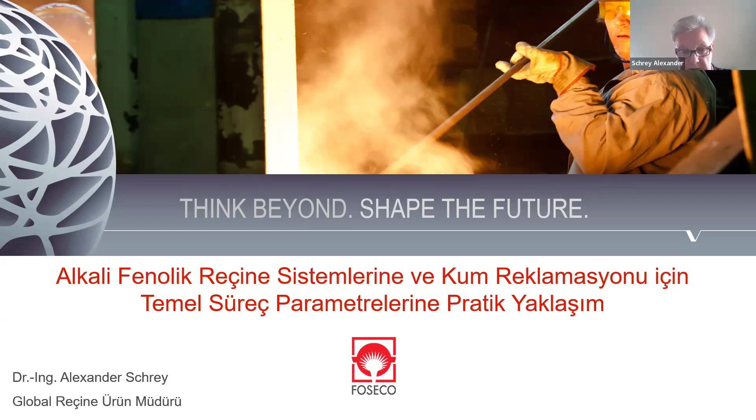Well, what are we talking about today? Alkaline phenolic binders, in particular those which are ester set. So we will cover the main binder components which are involved. Don't be afraid, I'm not doing any chemical lesson, not at all, but just introducing briefly the main binder components. From a foundryman's perspective, I think it's significantly more important to know something about the sand requirements. And of course, this is the practical approach. We are talking about product application and typical sand control parameters, which everyone who is dealing with this type of binders should be aware of.

We will spend some time on what we call sand management. So what is important for you and us, being partnering here, to control in respect to the sand management, including the important topic of sand reclamation. And finally, we will just sum up and go back to the main topics of this session.

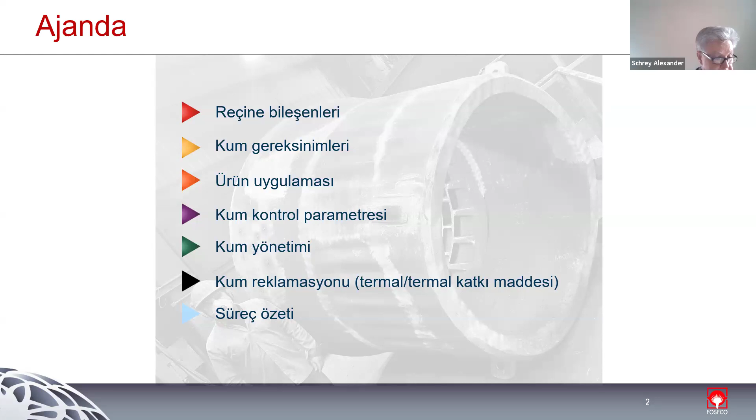So, basically, alkaline phenolic binders, irrespective of where they come from, where they are made, they are, from chemistry, always based on the same setup of main components. So basically, we are talking about a two-part system comprising a phenol formaldehyde resin and the esters as part two components, sometimes called catalysts. In that respect, that phrasing would not be correct. It's even more than a catalyst. It's a co-reactant which undergoes a chemical reaction with the resin.

The resin, as said, does contain phenol and formaldehyde, that's basic organic material. However, in contrast to many other binder systems you may be aware of, for example cold box binders, these ester set alkaline phenolics are water-based systems. They are highly alkaline due to the presence of alkali metals, which play a significant role. And as any phenol formaldehyde resins, these alkaline phenolic binders do contain various additives to ensure proper pattern release, for example, to ensure significant bench life, and also to ensure that the binder has good adherence on the sand grains. Part two, as said, is always, in any case, an ester, a single ester, or even a mixture of various esters. These esters are selected from various raw materials and composed into the final product in order to provide you with the required setting properties.

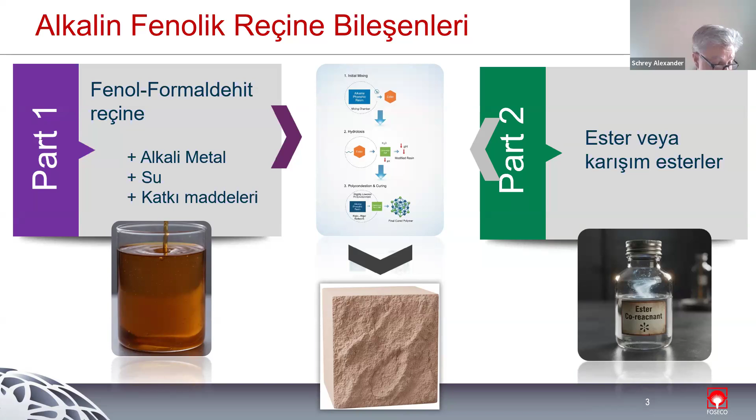So, sand requirements. I'm aware of that. There are probably many foundrymen from foundries who are casting basically steel castings. They may not in every event use silica sand.

However, silica sand is the most common sand material for alkaline phenolic binders. As you will see later on, other sands than silica, like olivine or chrome sand, are also applicable for these alkaline phenolic binders. There are not that many requirements in respect to silica sand, compared to cold box binders. So the binder system, alkaline phenolic, is less demanding. That means, for example, the acid demand value is not as critical as it would be for cold box binders.

Anyhow, we should aim for a high SiO2, silica sand or silica content. The simple equation is the higher the better. We recommend not to use any sand with less than 95% SiO2.

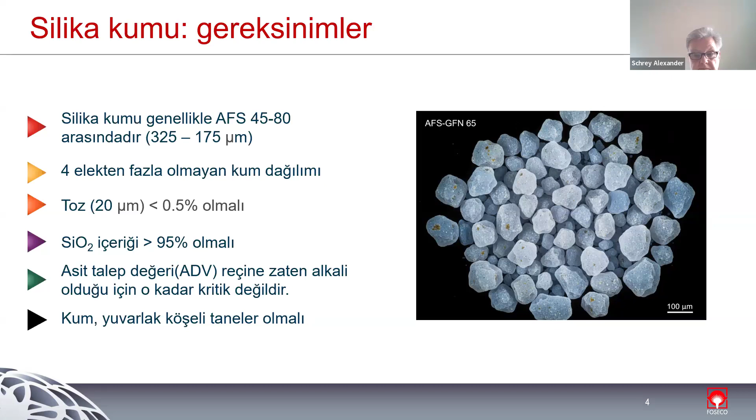Okay, let's now talk about some key parameters of product application. So, sand mixing.

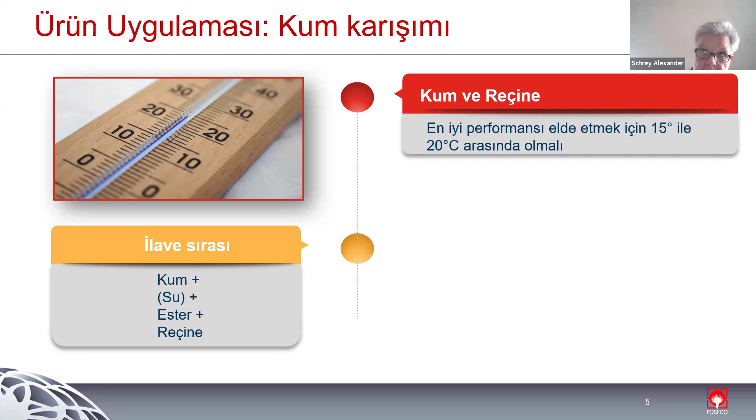Again, we are talking now, I know that, being a foundry man, probably from a just theoretical standpoint, and in particular when we are here with experts from Turkey, who are used to having significantly higher sand, binder, and ambient temperatures. But from the chemical standpoint, it would be ideal to keep both sand and binder around 20 degrees. This is just due to the chemical composition and the reactivity of the binder system, which works at an optimum at 20 degrees. Is this written in stone?

No, not at all. So we are also used to sand systems which have to work in significantly hotter climates. We are also used to working with alkaline phenolic binders at ambient and sand temperatures above 40 degrees. But this does certainly require a very good sand control, and that's what we have to state clearly - far away from being the optimum. So the closer you come to that level of 20 degrees, the better. But as said, alkaline phenolic binders will work, with good sand management and proper selection of binders and esters, also at higher temperatures, as well as they work at lower temperatures in wintertime, even down to 5 degrees.

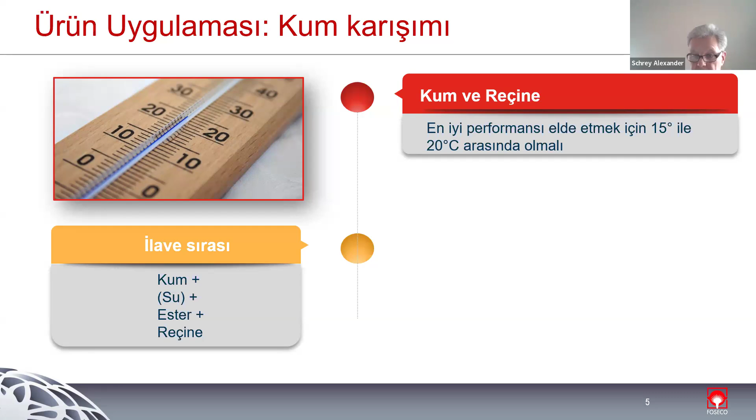Sometimes we even add, prior to the ester, some water. So what does it mean? Why should we add water, and when should we add water? Well, the addition of water is something special, which we experienced already many years ago. And I have to say in advance, this is not true for any binder system and not true for any sand system, but we should check whether or not the additional addition of water will improve the overall performance.

In general, the addition of water is, or can be, necessary only if you are using reclaimed sand, as reclaimed sand does contain residual alkaline components from the beforehand binder addition. We know that these alkaline residuals in reclaimed sand are highly hygroscopic, and they have a tendency to absorb water from the resin. I mentioned already in the beginning that these binders do contain water. So why not take the water from the resin, as it is in aqueous solution?

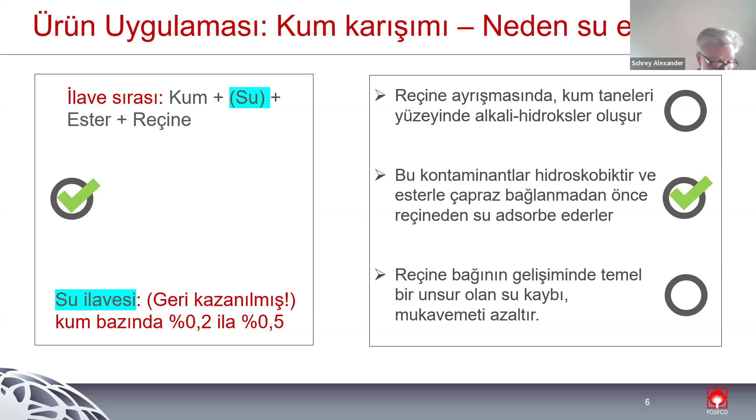This is something you should know, and we can check this in the lab pretty easily, whether this is essential for your individual binder system. But please keep in mind the addition of water might help to improve the overall performance.

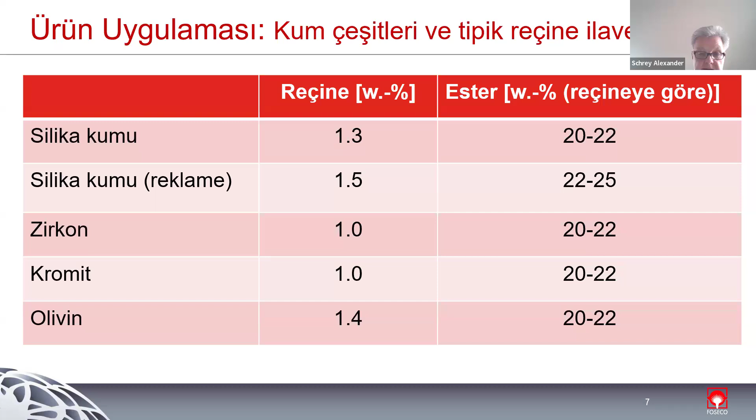If you are going to use reclaimed sand, the resin additions are slightly higher. We also displayed the typical binder addition rates for zircon, chromite, and olivine sand. These addition rates differ due to the open structure of the individual sand grain surfaces, as well as the chemistry of these non-silica sands. What you see on the right-hand side is that irrespective of the selected sand, the ester addition rate is always the same, between 20 and 25%, up to 25% for reclaimed sand based on resin. So these are the typical addition rates of the ester.

Something we would highlight in that context: on the right-hand side, we state that you should never ever add more than 20 to 25% ester based on resin. If you suffer from insufficient binder performance, please ask your binder supplier to check, but never add more binder or more ester to obtain better performance, as this will not happen. The ratio between binder and ester is constant, and if you just add more ester, you will not alter the performance. You will just increase costs and waste money.

Second point in that context, and this is significantly different from what you know from furan binders: if we want to change the speed of reaction while keeping the type of binder, we always have to change the ester grade, not the ester addition rate. So again, irrespective of the selected ester grade, whether you require a very short, medium, or long set time, the ester addition rate will always stay the same. You just have to alter the type of ester.

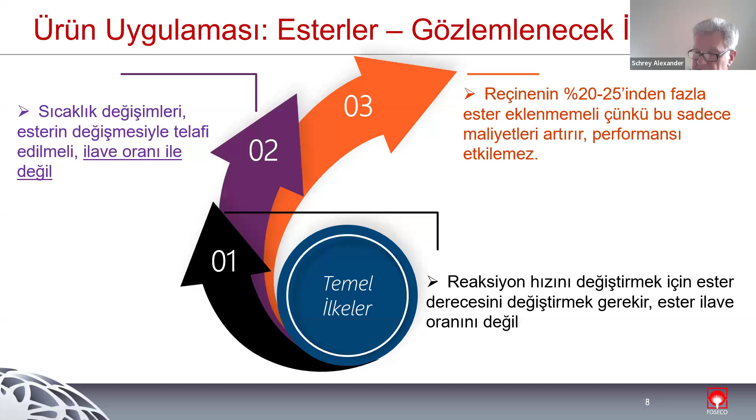Modern binder mixers and binder dosing units usually offer the addition of more than one grade of ester. But if you would like to spread the overall range of products to be made, talking about small cores, small molds, up to bigger or larger molds, you may have to alter the ester, as said.

This is usually no problem if you just follow one rule of thumb: you can mix a fast and a medium ester to get any set time in between the set time of the fast ester and the medium ester. You can also mix a medium ester with a slow ester to achieve something in between. But you should never ever mix a fast and a slow ester, as this would definitely not work and result in poor through-cure and spotting of areas in your sand mold which are not cured properly.

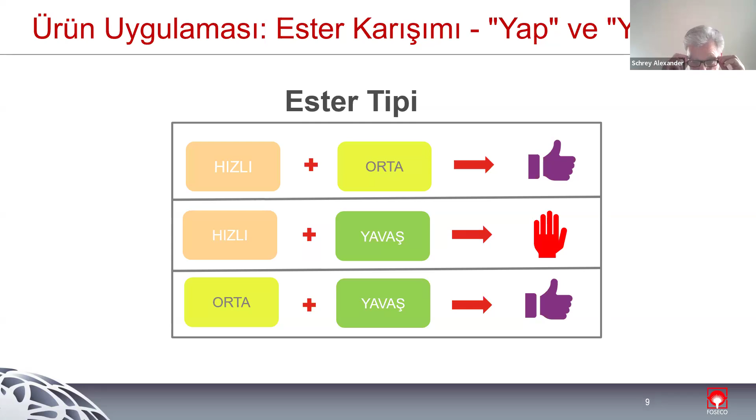So what does it mean to mix fast, medium, and slow? This has to be proposed by your binder supplier, who has to provide you with the information on which esters can be mixed easily in order to obtain the required setting properties.

Something which is quite often overseen is what we call mixer control. We strongly recommend cleaning mixers at the end of every shift, and also controlling these mixers with respect to blade wear and whether the injectors for resin and ester are still clean.

It is also important that you check whether your mixer has a couple of what we call hold back blades, in order to prevent what is called resin spotting, which is an uneven distribution of binder. So in case you see insufficient through cure in your mold, where some areas are cured properly and others are not, you should always have a look at your mixer prior to checking the binder or the ester.

It's very common that this is overseen, and just by putting a lot of caution to your sand mixer, to the quality of cleaning, the operation and the maintenance will certainly help you get the optimum performance.

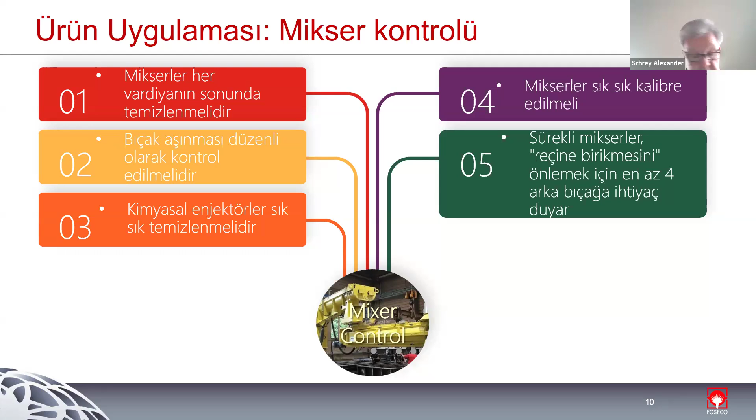Displayed again from practice, on the left-hand side you see a mixer that apparently has not been cleaned properly, and you can even see, displayed by the red arrow, some resin has caked onto that surface, with a relatively thick layer of cured sand.

This can cause uneven and unequal binder distribution. You see it here in the picture in the middle. This is what we clearly call resin spotting, so uneven distribution.

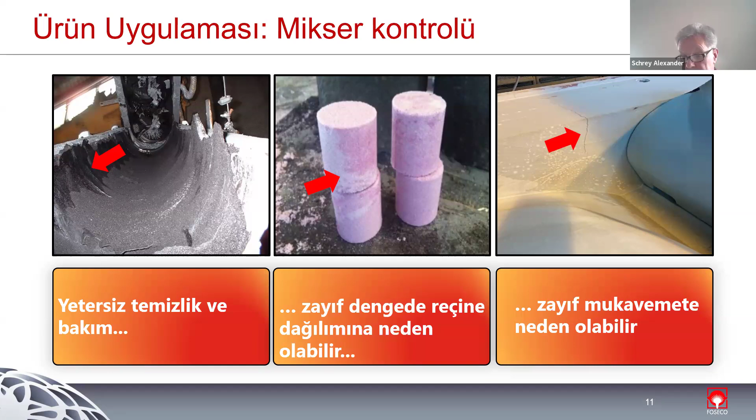However, in practice you will hardly see it if you are working with reclaimed sand. This is apparently new sand, where you can see as a result, once binder and ester have not been added properly due to poor mixer maintenance. And this, at the end, may cause poor strength and cracks as displayed here.

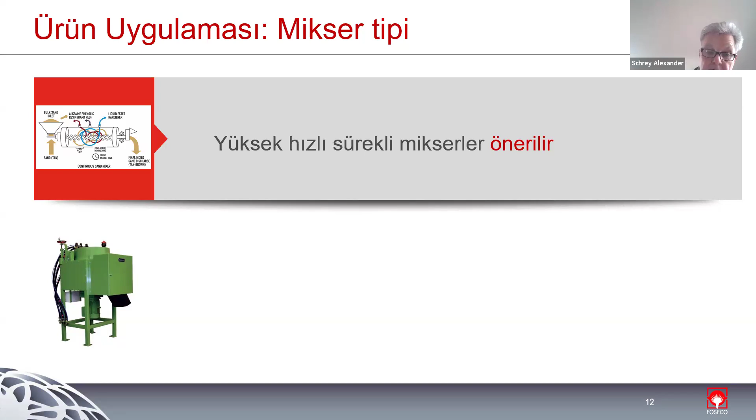Type of mixers, that's pretty easy. I think the majority of mixers used are high-speed continuous mixers as displayed above. You can, however, also use batch mixers, but this is in practice not very common.

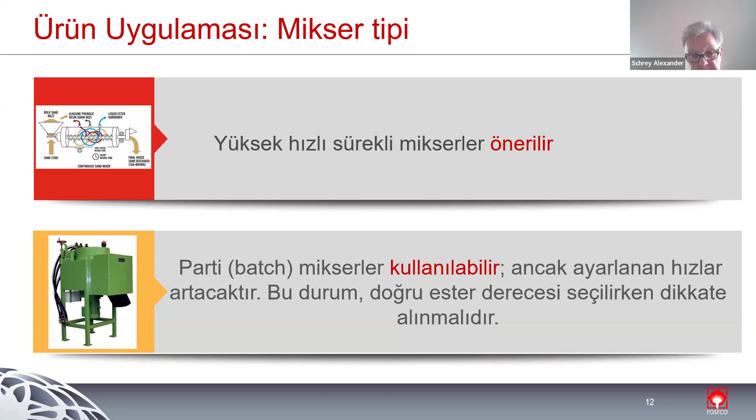If you have to do so, maybe to make a low number of cores in a different aggregate, you should take into account that the intensity of this mixing is higher in a batch mixer versus a continuous mixer, and therefore you probably have to go for a different type of ester in order to accommodate this.

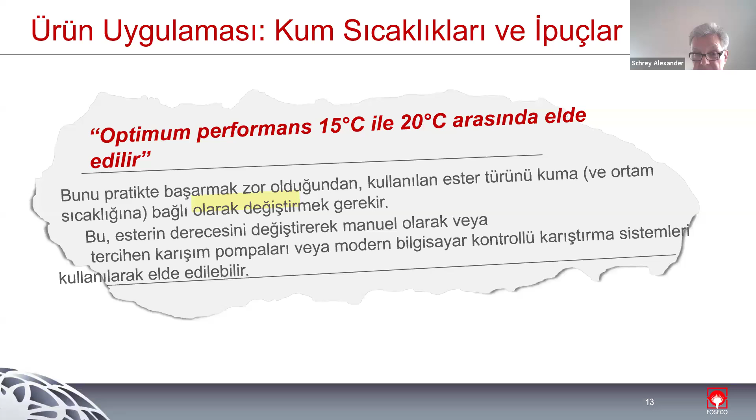As said, our recommendation is to work around 20 degrees. And as we are not sitting in an ivory tower, but know from practice that this is difficult or even not possible to achieve in summertime, you are probably going to go for a modern blending system, which we can highly recommend.

This looks more or less like this. You have a mixer, and in your control cabinet, next to the resin pump you have two pumps, a two-pump system for two different esters, and a learning PLC interface.

This also takes into account the actual resin and, even more important, sand temperature. Systems like this are capable of adjusting the addition rates and the composition of ester A and ester B, or ester 1 and ester 2, according to the required setting parameters, taking into account the sand temperature. This is highly recommended in order to make the very best out of your binder and your ester system you are going to purchase.

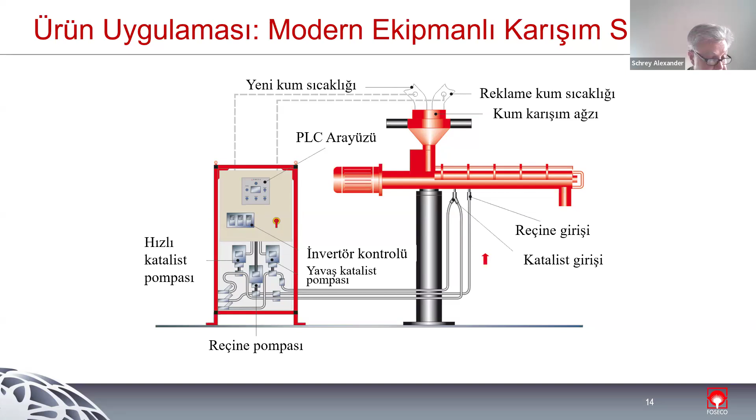Now let's go to the next chapter. Let's talk about sand control. Again, we highly recommend providing at least a minimum setup for internal sand testing.

Your binder supplier can help you in that respect, and we at FOSECO strongly believe it is an important service element. But irrespective of this, you should be able to at least monitor a few key performance indicators of your sand system by your own.

In terms of those which are important from our point of view, sieve analysis is definitely key to control both new sand quality and even more the quality of your reclaimed sand. The grain size distribution should span over 3 or maybe 4 sieve grades. This is sufficient for alkaline phenolic binder systems and the mold making process.

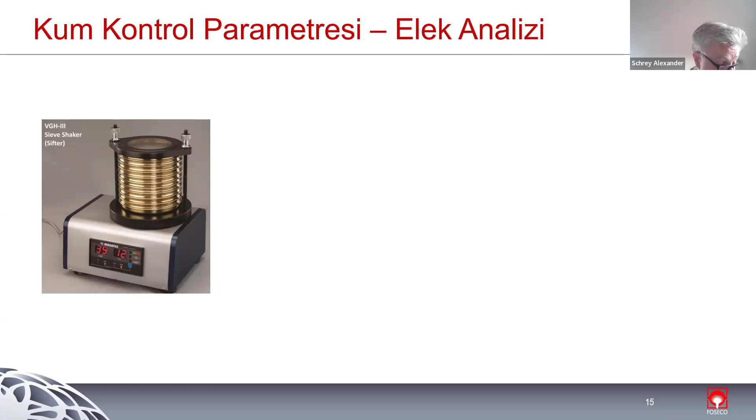As said already before, the level of fines, small particles smaller than 20 micrometers, should be as low as possible and definitely not exceed 0.5%. The world is not about to collapse if you have 0.6 or 0.7.

Sand is, as we know, not constant. But if you see a development that the level of fines is increasing, you have to counteract and try to minimize this, usually by controlling your reclamation system or your dust extraction system.

And in order to achieve good, consistent sand quality, you should also monitor that the AFS value from your reclaimed sand does not differ significantly from the given data displayed in your new sand certificate.

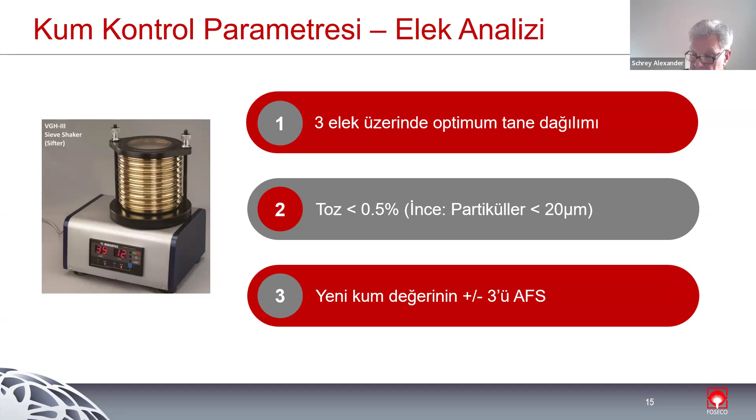Loss on ignition is a very simple method in order to control a key sand parameter. Basically, the loss on ignition measures the organic matter of your binder system. The organic matter means the phenol formaldehyde binder, which is part of binder component A, as well as the ester, which is also organic matter.

These tests should be run in a kind of muffle oven for 3 hours at 900 degrees. That's our recommendation. Then you are sure that all the organic matter has been burned off.

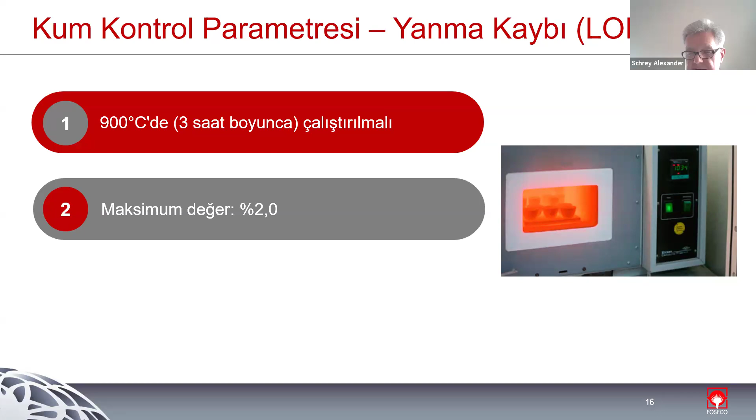So what are the values you are aiming for, you are looking for? We think if you are able to obtain about 2% loss on ignition as a maximum, you are on the safe side, and you should not experience any difficulties in respect to poor bench life or even gas defects. Again, if you are able to decrease this value thanks to a proper reclamation, that's even better. So anything between 1.5 and 2% loss on ignition is good.

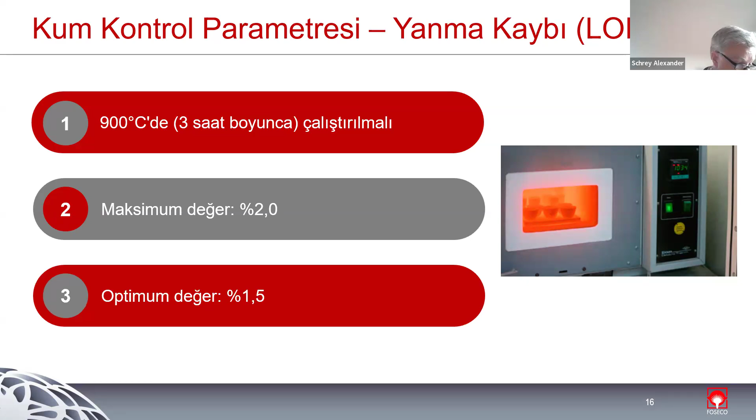The next parameter is, we have to admit, pretty difficult to measure in the usual foundry man's or foundry lab. The elutable alkali content determines the residual inorganic material. As we introduced in the beginning, your binder comprises a phenol formaldehyde compound next to alkali metal. And these alkali metals, which are essential for the operation of this binder system, stay as residual inorganic material on the sand. So even if you are burning the sand at 600, 700, 900 degrees, the inorganic material will stay on the reclaimed sand.

Here we again can give some indication. We recommend a value of maximum 0.2, and again lower values around 0.15, or 10% of the LOI, are indicating what is recommendable and what is good for your entire sand system.

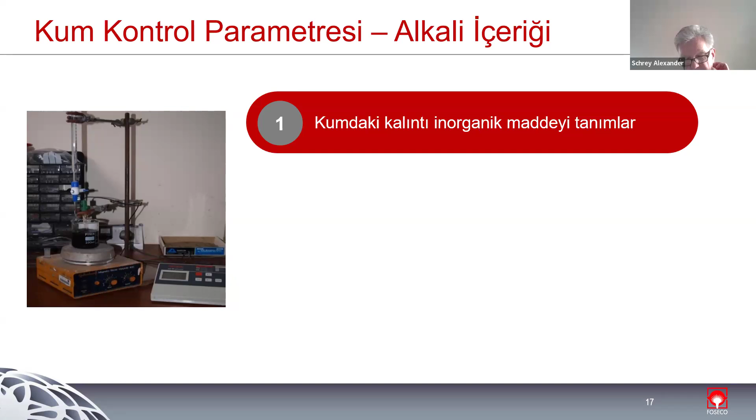If you exceed these values, you will definitely end up with lower refractoriness of the sand. You will reduce the bench life, and you will also reduce the molding strength. And due to low refractoriness of the sand, due to high residual inorganic material, you will also probably face sand fusion and the formation of sand lumps. And this is certainly something which nobody wants to have.

We acknowledge that, as you see on the left-hand side, this measurement of elutable alkali is a bit tricky, as it does require certain lab materials, relatively simple lab equipment, but it's a titration process which has to be done by an experienced worker, and results are not easily available in short term.

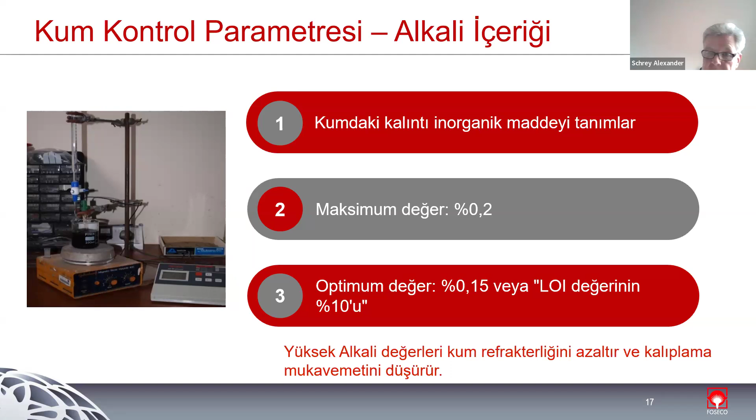A good replacement from our point of view, and an alternative to the measurement of elutable alkali, is to measure the electrical conductivity. And the measuring device is displayed on the left-hand side. If you do so, you will end up with results in very short notice. So the entire measurement takes just a few minutes, including preparation of the sample.

You will get results which clearly indicate whether your sand does contain a lot, i.e. too much, or an appropriate level of alkaline compounds. This is something we can clearly recommend, and this is in particular a very good measure in order to control reclaimed sand.

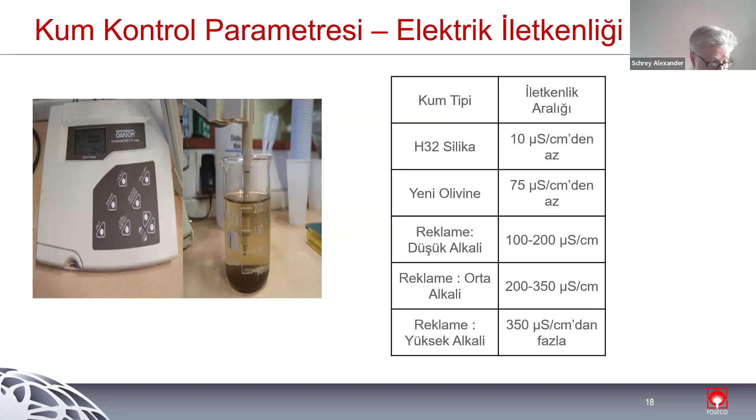You may have heard about the pH value. We mentioned in the beginning that these alkaline phenolic ester set binder systems are highly alkaline, so they have a very basic pH value, and maybe your sand lab is already measuring the pH value to control new sand quality. This is good, and this is something we can still recommend. But is measuring the pH value also something you should do when you control your alkaline phenolic binder system?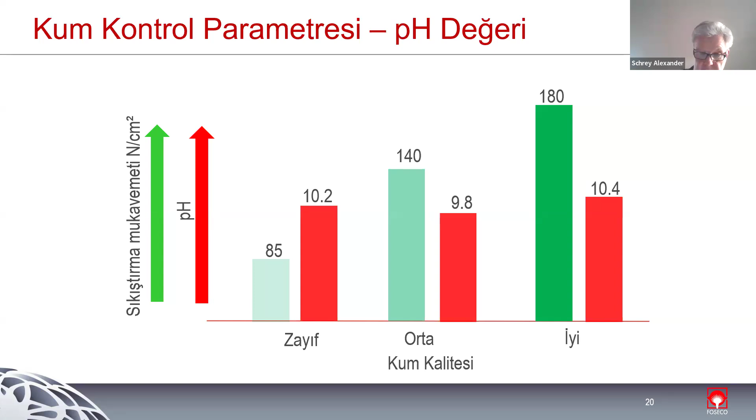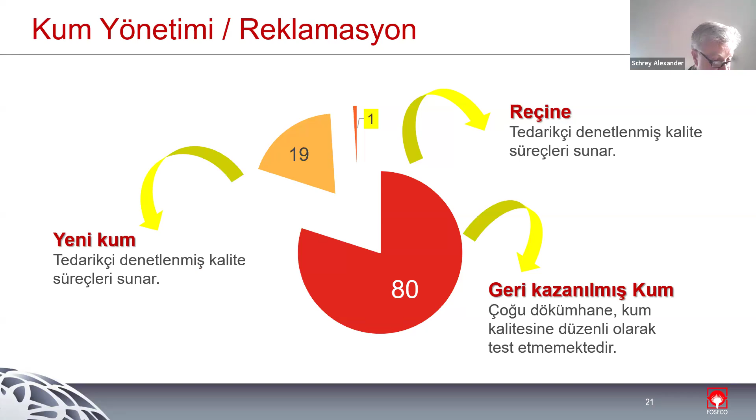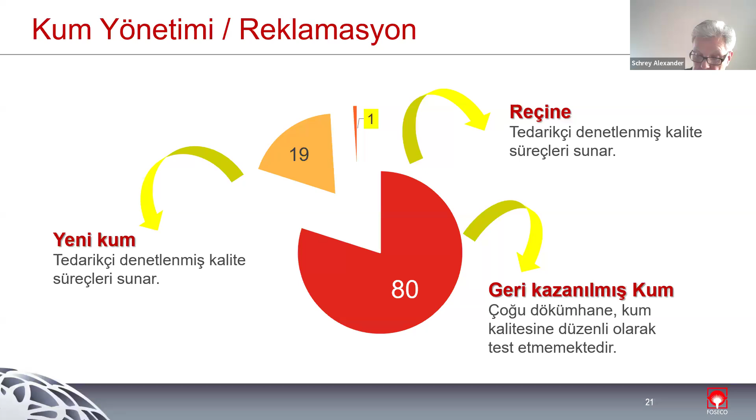All right, talking now about sand reclamation. What we would like to address is that apparently we know that both the binder and the new sand undergo audited quality processes before they enter any foundry. But if you just put it into that display as we did, you see both new sand and resin may make up 20% of the entire sand. The majority is reclaimed sand. And reclaimed sand is therefore quite often the unknown component, however having a strong impact on the overall performance. So therefore it's a necessity to control the reclaimed sand and to know where you are and what to do.

Basically, reclaimed sands are used to lower process costs, as you do not need to go for new sand. And apparently you also overcome the problem of excessive waste sand disposal, which is usually also associated to costs.

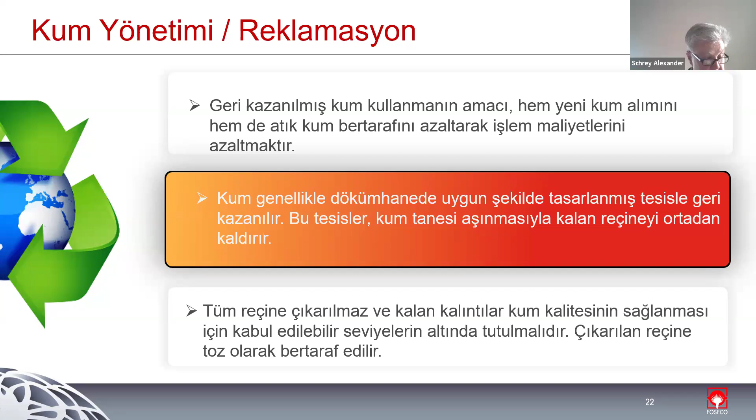The reclamation process is basically just defined by removing residual binder by sand grain attrition, if you are talking about mechanical reclamation, or also thermal reclamation, which burns off the organic matter, as mentioned before. In that context, it is important to understand that there is no need for you to remove the entire binder from your reclaimed sand to be used again in the next cycle. This is not necessary at all, but you have to remove residual binder to a certain extent. And this is probably some of the key learnings which we would like to make you familiar with. This is very important to understand and to put into daily practice, in order to balance out what is necessary to have a proper sand to be reused, but not to spend too much energy and too much money at the end in sand reclamation.

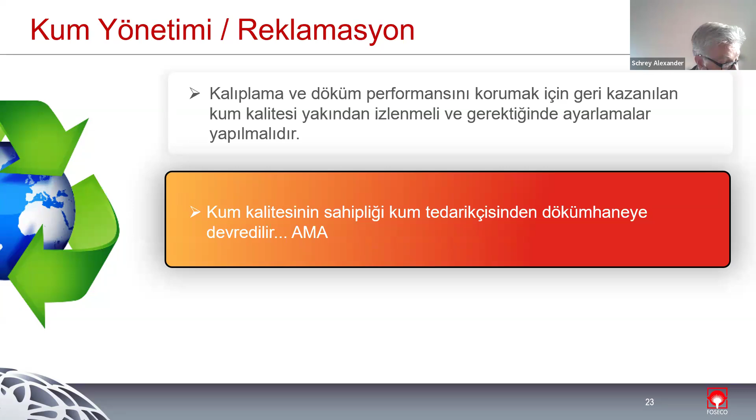As said, the before mentioned sand control systems are definitely something we are recommending from FOSECO to monitor and control your sand. And what we can offer as FOSECO is also to help you in that respect and to support you in order to get the best and consistent sand quality you have to have.

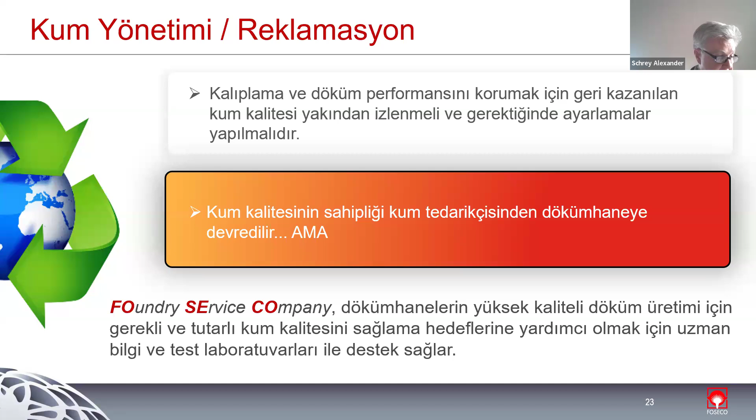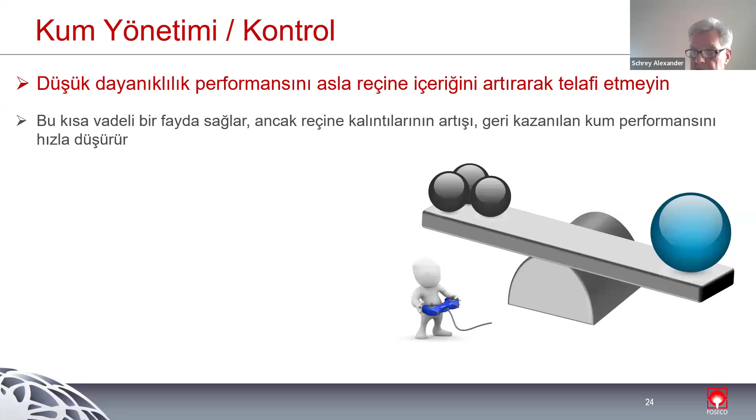So in that respect, what we already mentioned beforehand is you should never, ever compensate poor strengths, low strengths, by increasing the binder content. If you already suffer from poor strengths, it is absolutely essential to identify the root cause for this. Just adding more binder will not heal the problem in any case.

Some experiences is that we used to make critical molds or pretty complex cores in alkaline phenolic binder systems, usually with new sand. In order to process as much reclaimed sand as possible, in order to save new sand or to reduce new sand purchase, we recommend to use reclaimed sand always as backing sand, and also to use reclaimed sand in particular if you are using mold boxes. So again, not surprisingly, if you are working on boxless molds, you have to even monitor your sand quality to a much higher degree, as the strengths have to be higher for boxless molded molds.

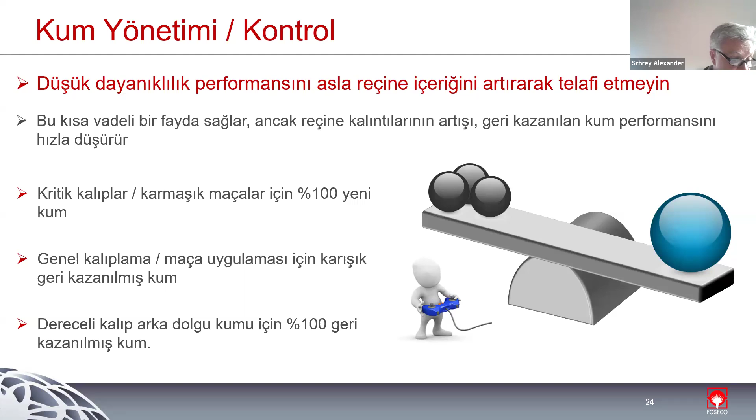Well, what is the meaning of sand reclamation? So basically it's about the reusage of sand after pouring. And by means of the reclamation process, old binder components, the residual binder, has to be removed. In that respect, as said, we recommend to remove the binder largely, but not completely. It is, as said, not necessary to remove the binder completely in order to achieve a good sand performance and consistent sand quality. This is not necessary at all.

And we are trying to make you familiar with this statement by using this display, this graph. As said, alkaline phenolic sand contains, once it has been used, residual organic binder and residual inorganic binder. In terms you apply a thermal reclamation, you are immediately removing the organic binder completely. So after a thermal reclamation, all the organic compounds are burned off, usually as water and CO2, and they are gone. The inorganic binder, however, stays. The residual inorganic binder stays. And even after thermal reclamation, there's a certain content of inorganic binder still on top of your sand grains.

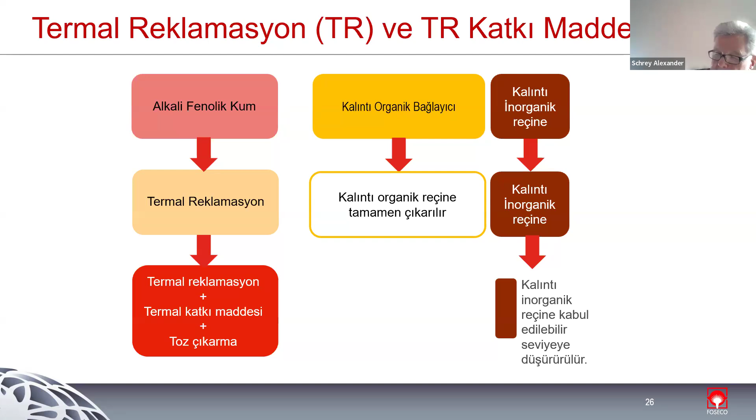By means of a thermal additive and a proper dust extraction, you are able to remove the residual inorganic binder, i.e. the alkaline compounds, to an acceptable level. And we have run in our lab a simulation of a thermal reclamation. This is just about to show you what is going to happen in practice. You do not see it in your foundry, but we have done tests in our laboratories, and the findings of this test sequence, of this test program, is now displayed in the next slides.

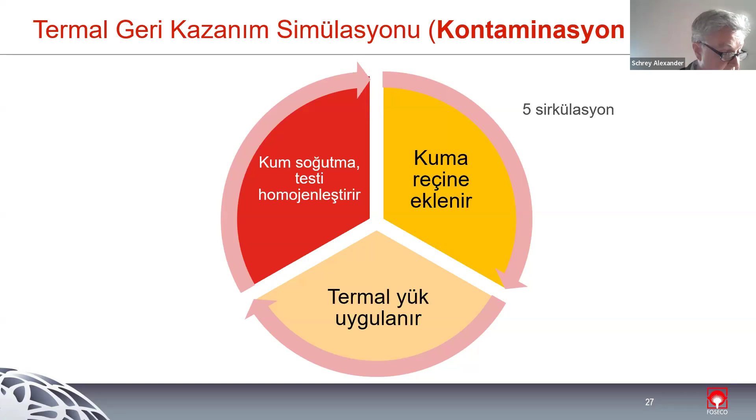So what we have done is we have taken new sand, added binder, applied a thermal load, and after that cooled down the sand and run a proper homogenization process, and then started testing. And this has been done 5 times. So we added binder 5 times, which has been burned, simulating a casting process, and then we have tested the sand we ended up with. And what you see is the display of typical sand parameters, which have been already mentioned beforehand, after these 5 cycles. You see on the left-hand side, we start with new silica sand, and the pH is apparently just driven by the pH of the new silica sand, which is about 6.

LOI, there's almost no LOI, as new sand is free of organic matter. Once we have added binder in cycle 1, 2, 3, and so on, the level of organic matter from binder is going to increase step by step, as displayed by the loss on ignition line shown in green. As mentioned before, the pH value does not matter at all. Even after adding just one set of binder in cycle 1, we already have a pH of 10, which does not change at all when adding more binder.

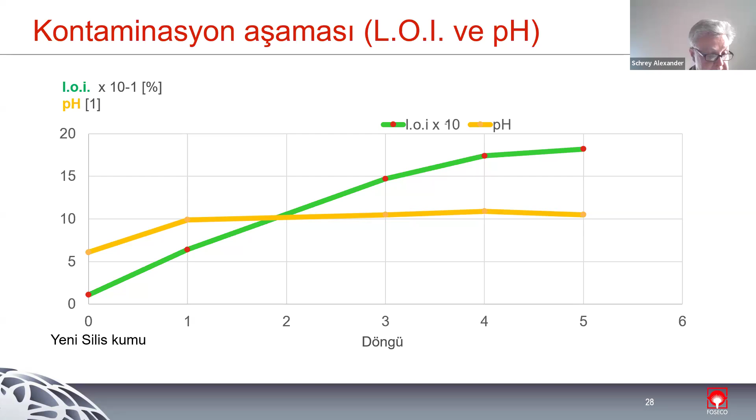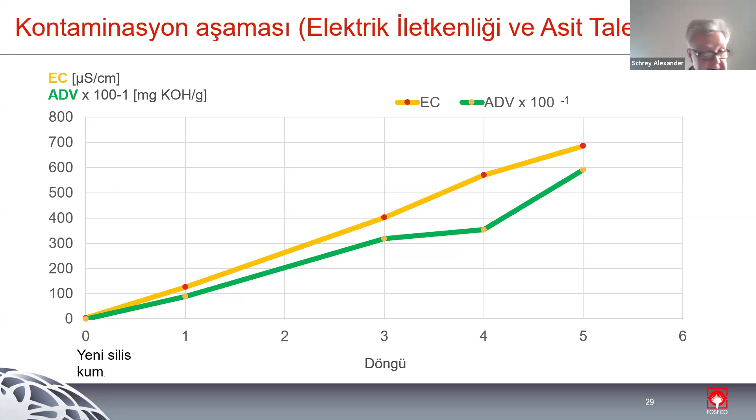What is changing as well? As mentioned before, the electrical conductivity is also changing incrementally, step by step, cycle by cycle, from close to 0 in new sand up to 700 microsiemens per centimeter after 5 cycles. The ADV, the acid demand value, performs almost the same, but it requires a titration process, and we do not recommend measuring ADV. Measure just electrical conductivity instead. That's much easier to do and also very, very reliable.

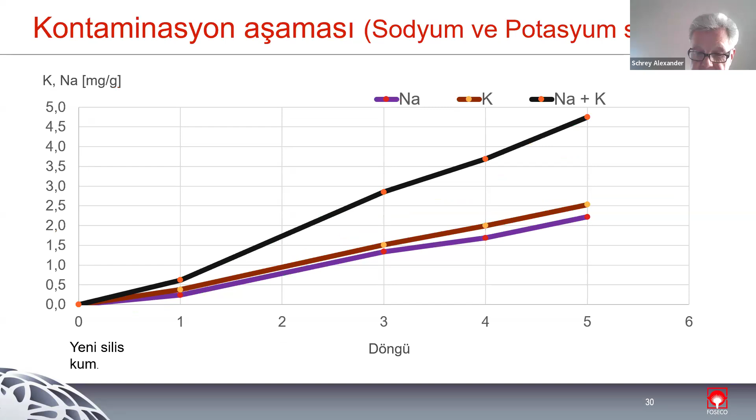We have even checked the true level of sodium and potassium in sand after each cycle, so after step 1, 2, and so on. You see the level of inorganic matter is going to increase as expected, step by step.

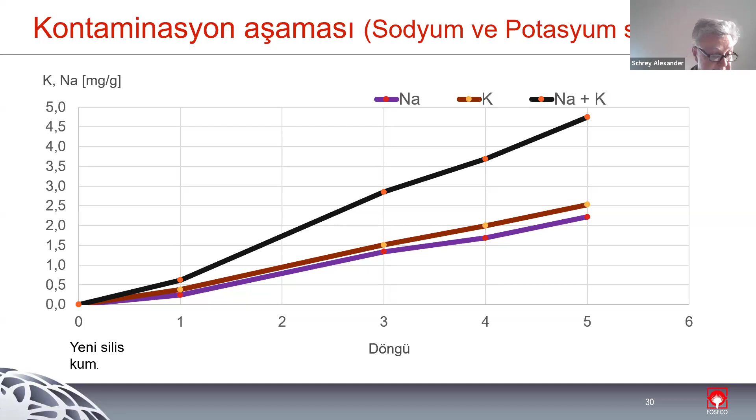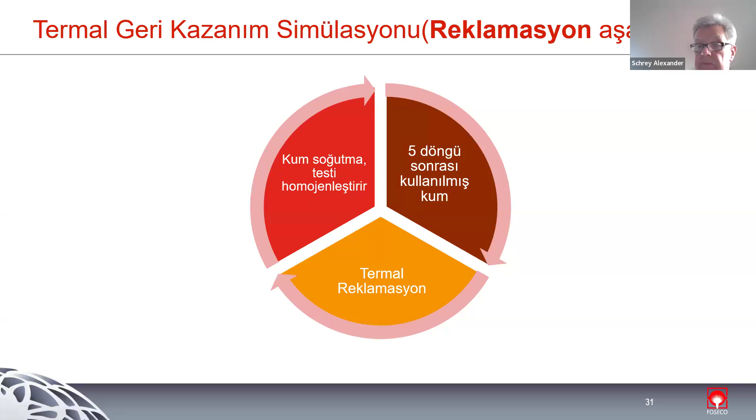As mentioned before, pH is apparently not helpful, not meaningful at all. pH has increased slightly, but it does not give us any indication of what has happened. What you see is that the electrical conductivity has gone down to a bit more than 400 microsiemens, and the sodium and potassium levels are almost the same.

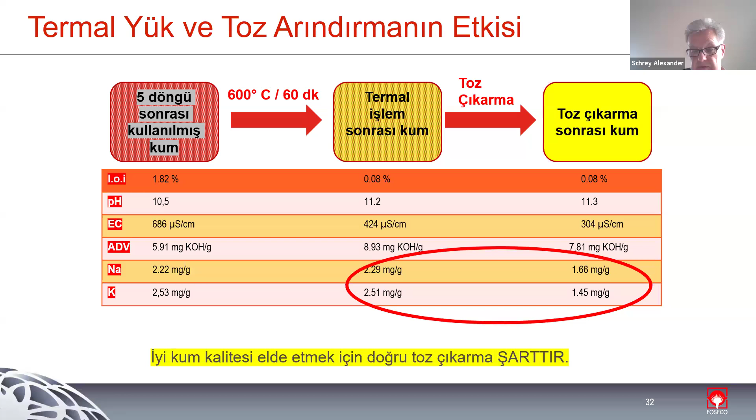So in the reclamation phase, with dust extraction and without dust extraction, you see, as mentioned before, a significant difference in electrical conductivity. Now we have added a thermal additive, and you see that irrespective of whether you have dust extraction or not, the electrical conductivity goes down.

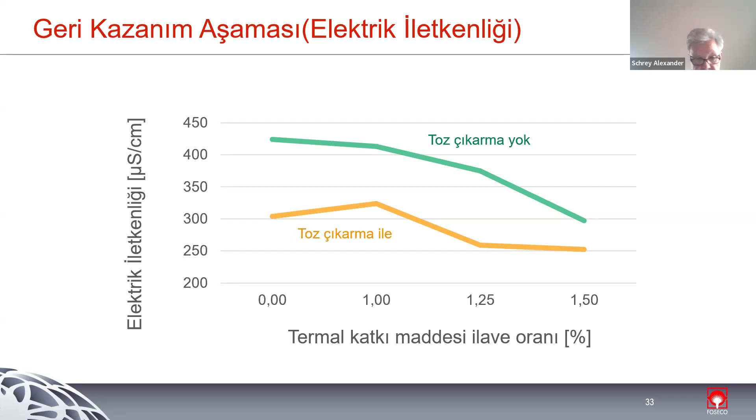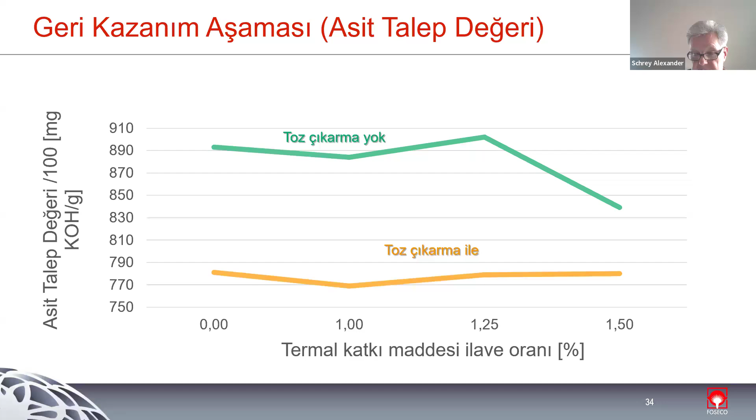However, a better sand quality, i.e. lower electrical conductivity, is only achieved if you extract these fine contaminants of alkaline components by means of proper dust extraction. We have done these measurements also for the acid demand value, which follows the same concept and the same principles.

We have even measured finally the true level of residual alkaline components, sodium and potassium, based on different addition rates of a thermal additive, again with dust extraction and without dust extraction. The learning is: just by applying dust extraction, you are on the right path to improve sand quality.

Secondly, this should be powered also by a thermal additive, and the application rate, the addition rate, is about 1.5% if you use a good thermal additive in order to achieve a good quality sand in combination with a proper dust extraction.

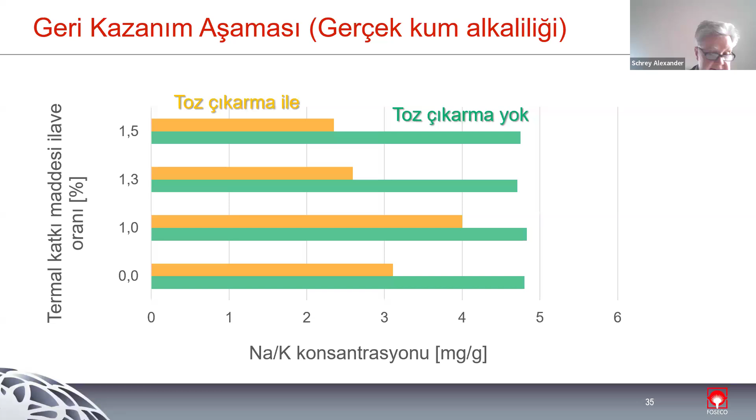How does the addition of a thermal additive look like? Basically, these thermal additives are products which are liquid. They contain a clay, and this clay has two tasks to fulfill. On one hand, the clay undergoes a chemical reaction with the residual alkali, and this helps to reduce the alkaline content in your reclaimed sand. But secondly, and this is as important as this removal of alkaline, is to prevent the sand from forming lumps and to fuse. So once this thermal additive is supplied to a foundry as a liquid additive, we just blow air in order to homogenize this liquid and the clay within the IBC tank.

You can also add a kind of IBC mixer. So just mixing up this additive prior to application is even simpler than mixing up a water-based coating.

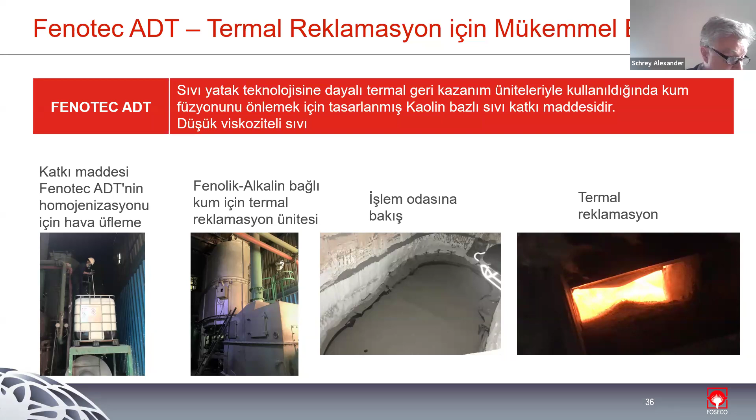So I have now spent almost 60 minutes in talking, and I'm coming to the very end of my presentation, ladies and gentlemen. Thank you for all your patience and your interest. Let's just summarize what we have discussed.

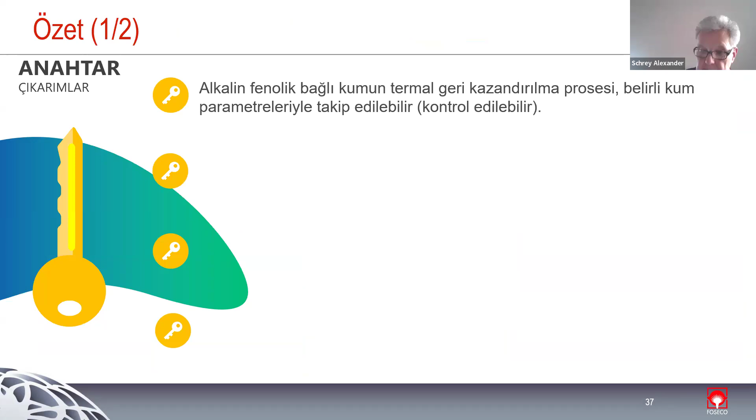The thermal reclamation of alkaline phenolic sand can be controlled by certain sand parameters, which has been displayed and explained. We strongly recommend you to work with the maybe new way of measuring the sand quality by means of electrical conductivity. These measuring devices are broadly available. They are not very expensive and they are pretty reliable.

This processing can be done easily. FOSECO is happy to support you in that respect, to make you familiar how to measure. And as important is, do not measure pH any longer. pH does not give you any indication and any meaningful finding in order to control the sand.

Once you get familiar with measuring the electrical conductivity of your sand, you will also be able to find a correlation with the true potassium and sodium levels in your sand. And in that context, it's also worthwhile to mention, in order to find this correlation, your binder supplier is able to support you.

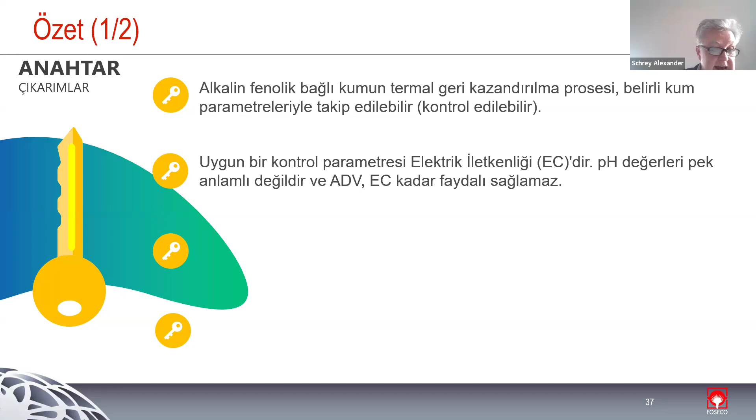A good thermal additive can definitely support in reducing the residual alkaline components even to a higher degree. However, as said, it is not necessary at all to remove the entire alkaline content.

Yeah, and finally, please forgive me that I'm restating this. As said, it is very, very important to pay much attention on the dust extraction process. Again, this can be controlled easily by sieve analysis and by measuring the fines, as a proper thermal reclamation of alkaline phenolic sand does require a proper thermal reclamation plant with controlled addition rates, with controlled fluidized bed temperature, by employment of a good thermal additive and a proper dust extraction.

That's it. Thank you very much for your patience and for your interest. And this is now the end of my presentation.